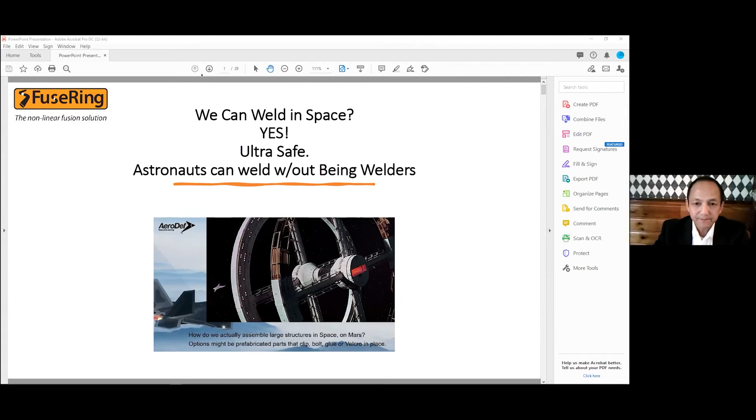If I may just read some history by NASA. This is a review of welding in space and related technologies, NASA 2020. Deployment of welding and additive manufacturing technologies in the space environment has the potential to revolutionize how orbiting platforms are designed, manufactured, and assembled. These technologies offer the option for repair of sustained damage to habitat structures on space missions, as astronauts will be able to manufacture new parts and weld cracks.

An added benefit is that required repairs can be achieved more economically, as new parts need not be shipped from Earth. With further maturation of in-space welding capabilities, astronauts can operate under given standards and weld damaged structures rather than rely on cargo resupply. Next.

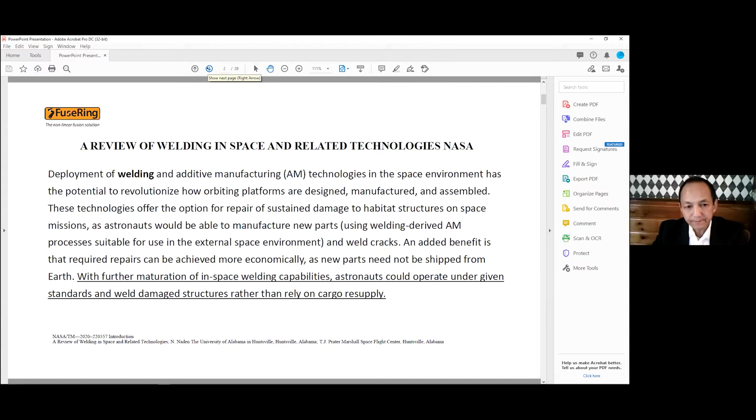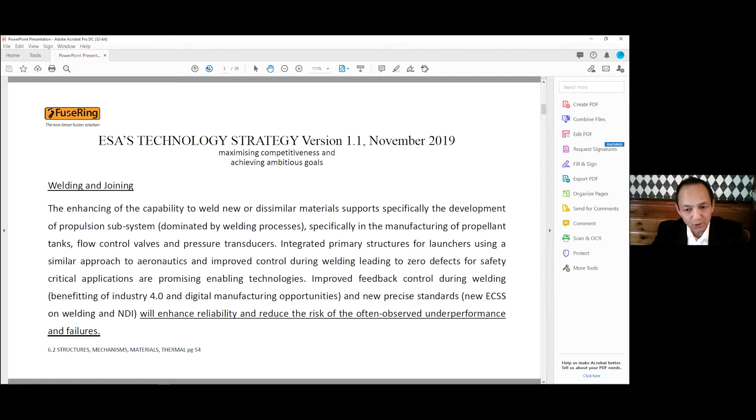And this is from the European Space Agency, November 2019. I'll just read a little bit. Welding and joining will enhance reliability and reduce the risk of the often observed underperformance and failures. So they're looking for solutions also. Next, please.

So just briefly in history, the Russians were the first to weld in space: 1969, Soyuz 6 with the Vulcan welding unit. NASA followed in 1972 with the electron beam. And since then, it all came to a stop, and nothing's been done for the last 45 plus years. My belief is it was never pursued because NASA and Russia deemed welding in space too dangerous and they could not scale. Next, please.

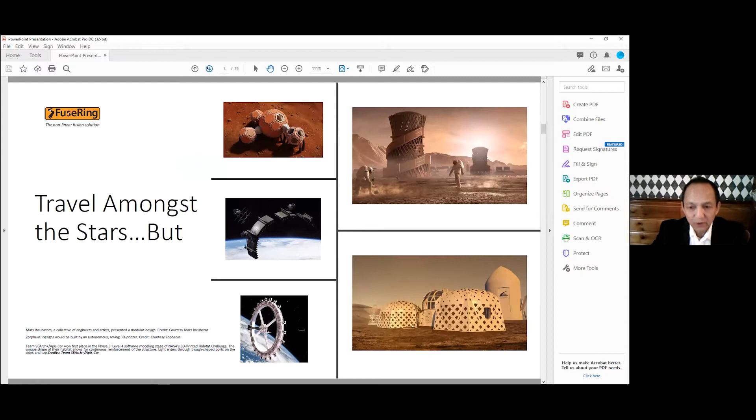So I think it's the aspiration of mankind to travel amongst the stars. And some of these structures on the right are the winning designs given by NASA. But before we do that, we need support structures, as Dallas mentioned, and a few other folks have mentioned earlier. We need a Pony Express, an outpost, charging stations, just like in the old frontier days. Next, please.

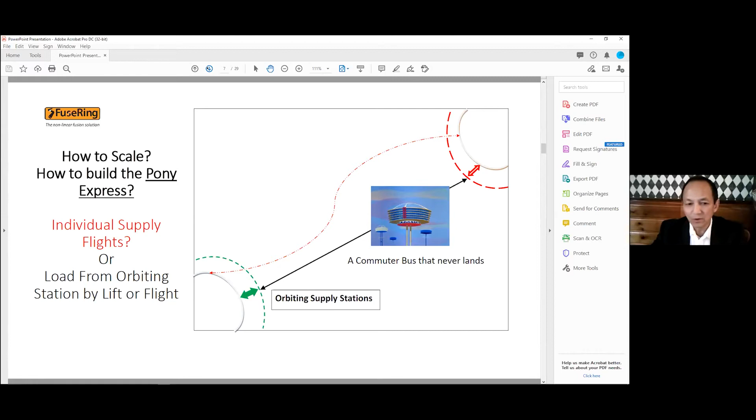Now, if we agree on the assumption that we need to scale, we need to build the Pony Express, the question is, do we do individual supply flights where we take off, carry the load, land, and leave the infrastructure on Mars or on the moon? Or we load from orbiting stations by lift or by flight? Remember the Jetsons, this is what I call the commuter bus that never lands. So we load from orbit, travel the distance, unload, come back. That's it. It never lands, it never touches Earth or the moon or Mars. Next, please.

So if we agree we need space stations and infrastructure on Mars and beyond, just like the movies. My first sci-fi movie was 2001: A Space Odyssey, 1969, I think. So how do we assemble large structures in space and on Mars or the moon? Today's options might be prefabricated parts that clip, bolt, glue, or Velcro in place, amongst a few other things. Next, please.

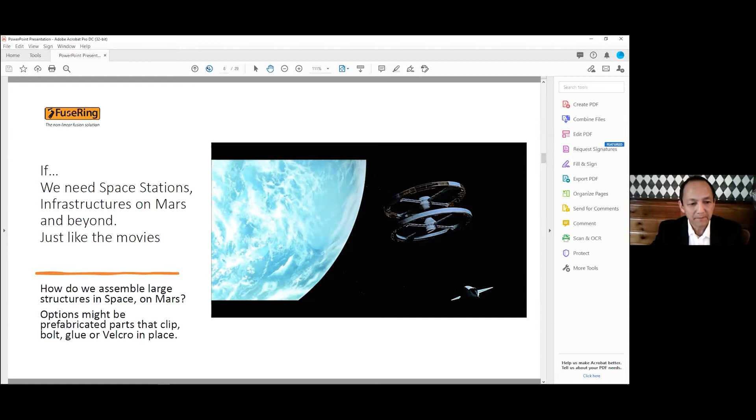But the support structures, whatever we build, must be robust. Permanent space stations must withstand vibrations and the odd impacts, because if that bus goes between Earth, Moon, and Mars, one of these times something might happen, it'll bump into something. And how do you repair that?

And the structures on Mars must withstand windstorms. If I believe Matt Damon and The Martian, the windstorms on Mars can be severe. But much more to learn about that. Next, please.

So there are different options to weld. Welded structures offer strength and rigidity. It can be repaired on site without waiting for replacement parts. This is one of the most efficient, the fastest welding. One of the options is K-TIG by Australia.

Welding in vacuum and zero gravity offers challenges, but there are options. Techniques are fast, works for thick and dissimilar material. But this technique doesn't work in zero G. It works in vacuum, but not zero G, because when they melt the metal, the splatter cannot be accepted. Next, please.

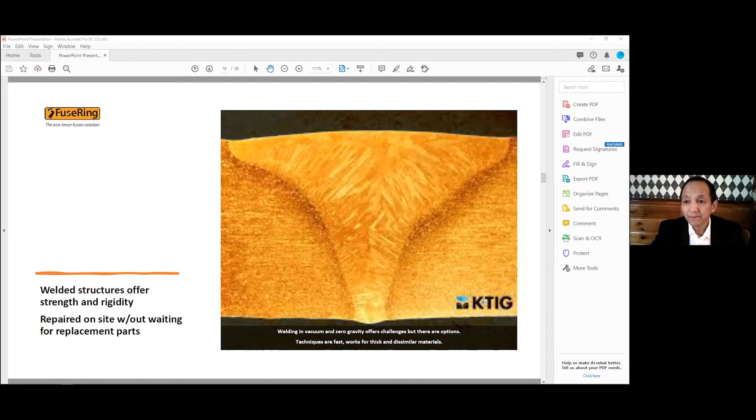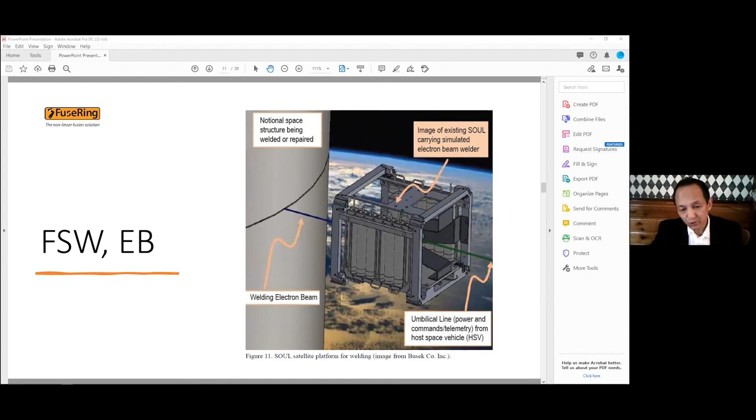So friction stir welding and electron beam are the current accepted options. The picture on the right, as I'm sure you folks know much more than I do, is electron beam proposed and researched by NASA through a company, I think it's in Florida. The electron beam on an umbilical cord. Electron beam is great, but there's other issues with that. Next, please.

So, to get to the heart of this presentation, what if there is a weld that is truly automated, autogenous, fine grain base to base, in compression, low to no residual stress? That's an assumption for now, being tested and verified by an institution. It resists embrittlement, and there's no fusion line. It is ultra safe and zero toxic fume.

For pipeline and confined space, the toxic fume is becoming a very real issue for Earth applications. And the embrittlement is not so important for space because we don't have hydrogen embrittlement out there. We have radiation, but not embrittlement. Next, please.

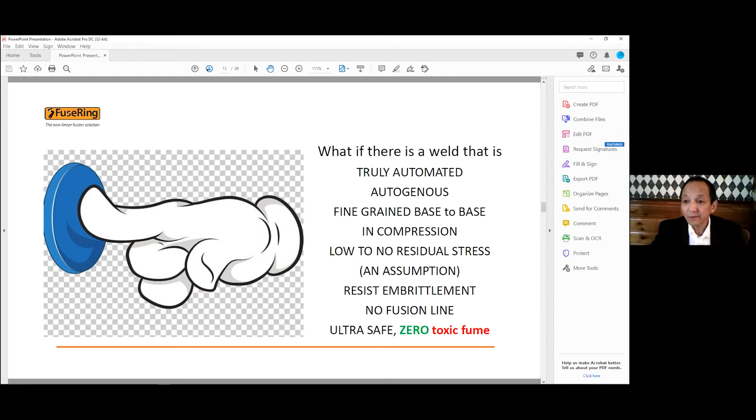So, what if we have an alternative that delivers this quality? For the non-welding folks, this is one of the best welds on Earth right now. No BS, on the level. None of our overseas competitors have this ability or the concept to make this quality. Next, please.

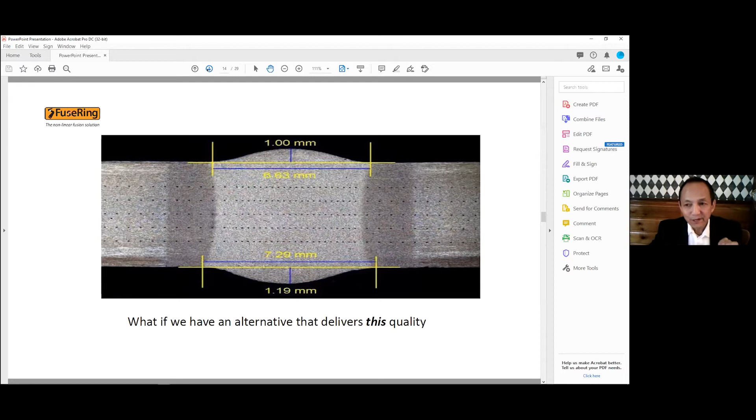I'd like to talk about solid state induction. There are three variables. The quality and the integrity is documented in real time at the job site, in orbit, and at HQ, like in Houston or on Mars or on the moon. There's no interpretation required, strictly by the numbers.

The majority of the power is induction heat. It supplies over 95% of the required power to join metal. Shear and forging force comprise less than 5% of the total required energy input. That is significant. So on the comment on the left, this technique welds with technicians, not welders. So astronauts can weld in space without being welders because there's no human input. Once you set the parameters, you're done.

Pardon me. Once the parameters are set, there's no further action. It is one shot, less than 1 minute per weld, regardless of size or thickness, and is repeatable. And for tubulars, there's no root weld. For space, it is not important because we have no liquid on the inside to go through. For the OD and ID, they're identical, and we can regulate the profile to be flat. Next, please.

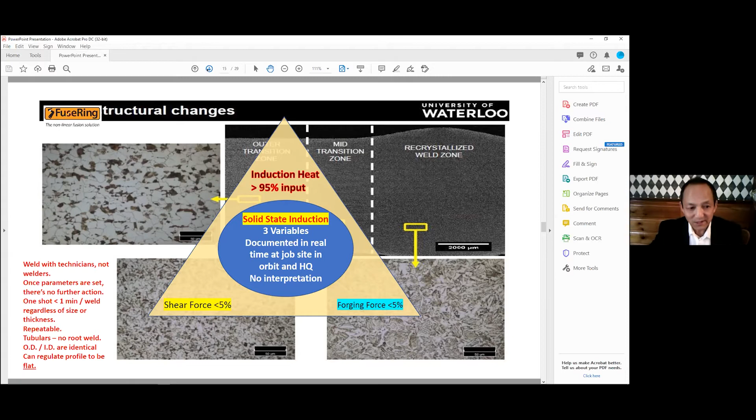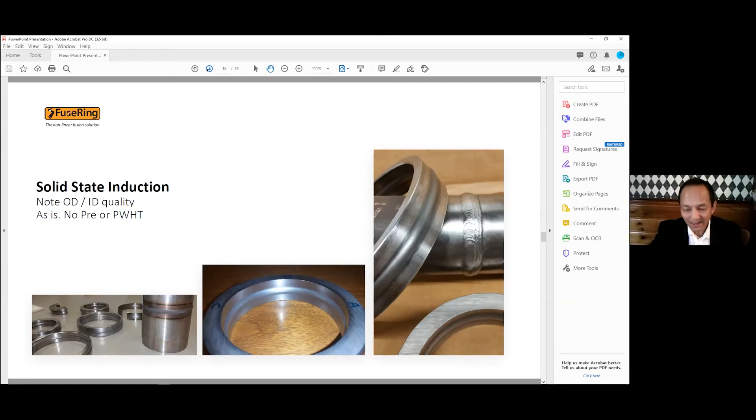These are samples of the welds done today. As is, please note the OD and the ID for the folks in manufacturing and the corrosion specialists. There's no preheat, there's no post-weld heat treatment. As is, the minute it's done, boom, that's it. What you see is what you get. Next, please.

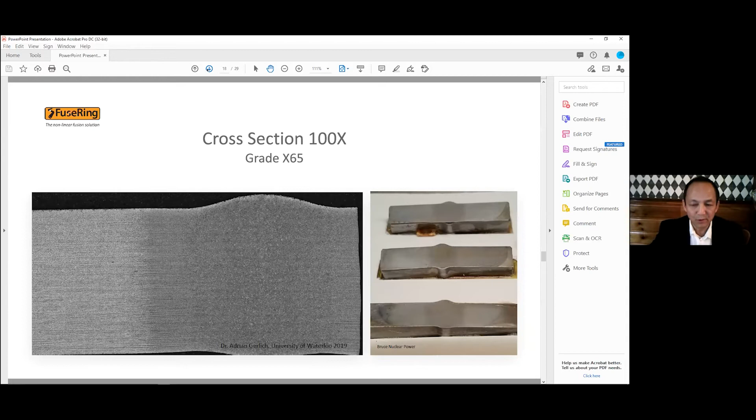And this is a cross section on just a regular grade X65 line pipe, nothing spectacular about the metallurgy, but this is a cross section. There's no fusion line in the middle. There's no heat affected zone. There's a heat transition zone, no question, but there's no heat affected zone. And the 3 samples on the right are from Bruce Nuclear Power, given to me with permission to publish. Next, please.

So to go back to the basics of what this is all about, recall in high school, we're told when you weld, keep both parts absolutely stationary, don't move it, and then put your stick in there and fill the gap. And afterwards, don't touch it, let it cool. But the problem there is we have 2 heat affected zones on either side of the weld. And that's a weakness. We'll come back more to that later on.

So the brilliance of this technique is this inventor said, one part keep it locked tight shut. Put a heating paddle between the work faces. Traditional thinking up to today mostly has been we heat the girth around on the outside.

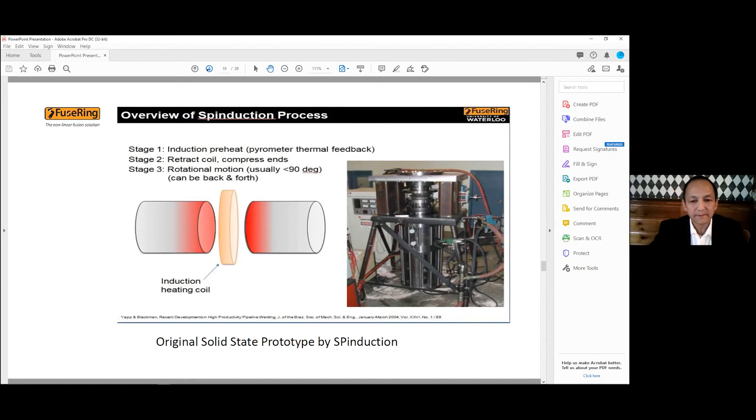But the brilliance of this invention is you heat between the work faces, up to a certain temperature, pull the heating paddle out, push the other part in and rotate, or rotate and push the other part in. By movement, you break the crystalline structure. That's why the crystals are so fine. And you relieve all the pressure. For pipeline and the hydrogen embrittlement that's coming up for the European and the US market, that is a critical, significant difference. So next, please.

So at the end result, when you take the heating paddle out, you move it in, you rotate. And it's just a little bit of a rotation. You don't need a whole lot. And it's not friction, because with friction you go a million miles an hour, dangerous, but there's just slight movement. Next, please.

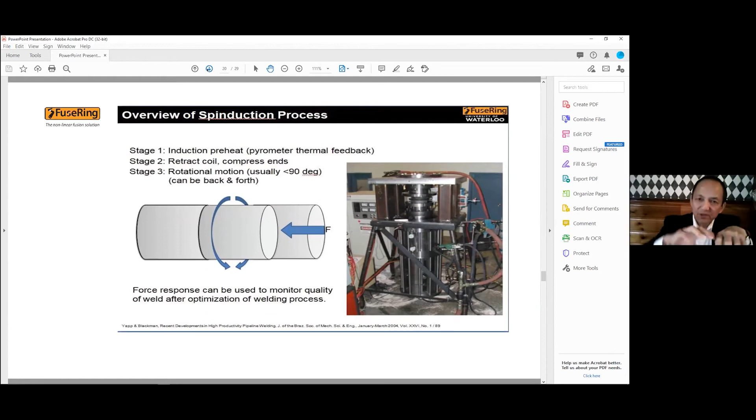So for the metallurgist, this is one of the finer details of the crystalline structure. To most of us, it doesn't mean that much, but it is significant. The crystalline structure on the left is the base metal. The bottom left is the base metal into the heat transition zone. And the middle picture is the middle of the heat transition zone.

But the most important is the bottom right. It is the beginning of the heat transition into the recrystallized zone. There is not that much difference. The crystals are fine grained. I have more on that, but if you're interested, we can get more into that. Next, please.

Fundamentally, this is the difference between what was invented and the FuseRing technique. The old method, as mentioned, one side is stationary, put a heating paddle between the work faces, pull it out, push the other part in and rotate. The FuseRing concept is what happens when you come to the last joint at an expansion joint or a valve for pipeline. Those are big stuff. You cannot move either end. Or in a nuclear reactor where the feeder tube comes in and the manifold is this side, you cannot rotate either side. What to do?

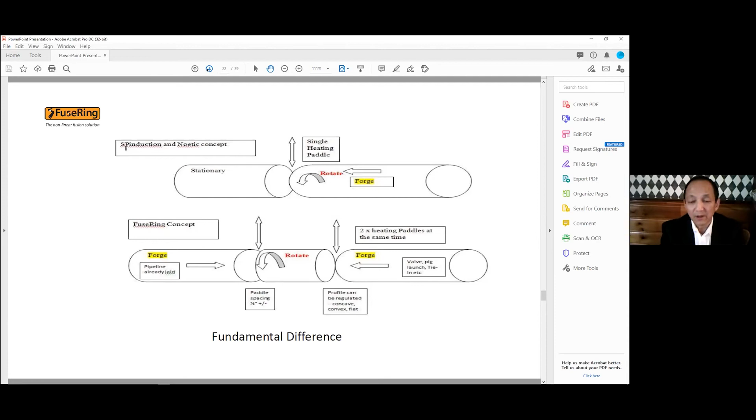My proposal was you put a coupler in between the two sides, heat both faces, pull the heating paddles out, rotate the coupler and push. The two ends, one of them might move laterally, but they'll never twist. So you rotate the coupler instead and push the one end in that can move laterally. And the USPTO says, yes, son, we agree. And they gave me a couple of numbers, granted. Next, please.

With this technique, we can work for three-dimensional structures. Tubular pieces can be assembled in 3 dimensions for space assembly using fuse ring technique. Fuse ring can be used to complete circular rings for, say, space station. We can assemble very large structures using this technique. Solid state fusion and fuse ring technique allows welded construction on the moon, Mars, and beyond. Next, please.

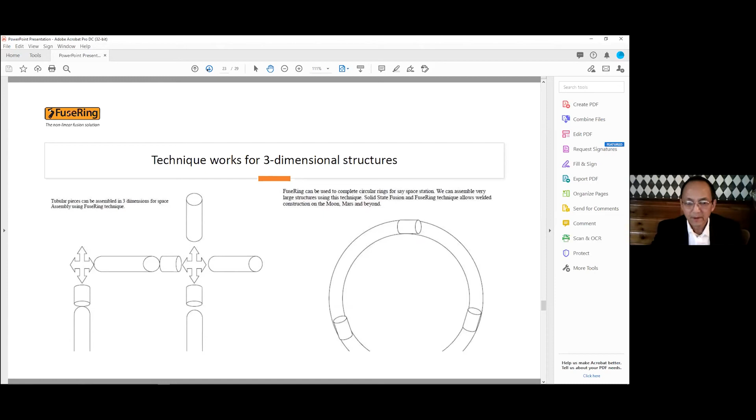So fuse ring joints, I've moved beyond that. Further IPs have resolved the problem. The puzzle has been resolved. We can use this technique to join flat, curved, and tubular geometry, regardless of size or thickness. So the applications are pipeline, refinery, nuclear refurbishment, shipbuilding, pharmaceutical, and food. Pharma and food is important because we offer a smooth ID, and that manufacturing sector needs and demands a flawless ID because they cannot have any germs or any bacteria buildup.

And we can weld shut spent fuel container lids next to fuel pellets safely because the technique is automated and it resists embrittlement on the inside and the outside against the hydrogen embrittlement. The third one, we can join 3, 4, 5-inch thick hull with no flaw. Submarines can dive deeper with certainty because we have no heat-affected zone. And it can join irradiated material because it's automated, it's one shot, and it's solid state. No human ever needs to be near the process.

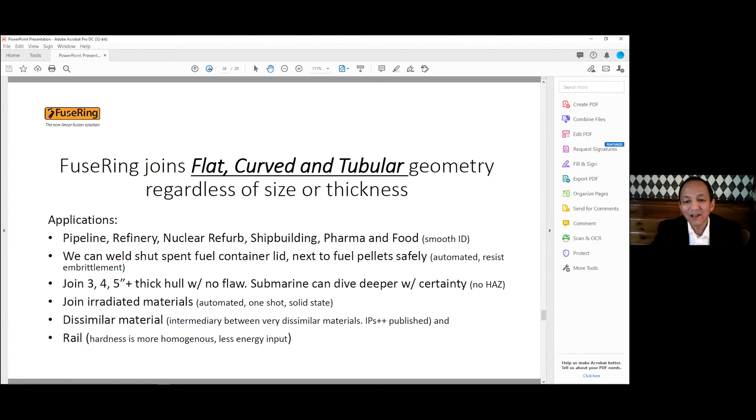For dissimilar material, intermediary between very dissimilar materials, the IPs are published for the automotive, for nuclear, different parts. But the last part, the most recent IP filing, is rail. The hardness of this technique is much more homogeneous and it takes less energy. Next, please.

So to make some money to pay for all the IPs and the presentations, rail is the lowest hanging fruit. They have pain. Fuse ring is the solution. And as a comparison, today's technology on the left is linear friction, sponsored by the government, because they're looking for better methods to join rail. And I'll explain that in a little bit. The top right picture is flash butt. It is the accepted technology for the last 50 years, because that's the best we can do. We accept it and we live by it. We live with it and we work around it.

Linear friction is the new exploration area. The heat penetration is less, but the forging force is huge. And so far, they have not been able to overcome that forging force, so it has not been able to be portable. The fuse ring offer, our heat penetration is in millimeters, single digits, millimeters. The remaining forces, the shear and the forging, are less than 5%. It's insignificant. So it can be portable and the entire process can be electric. Next, please.

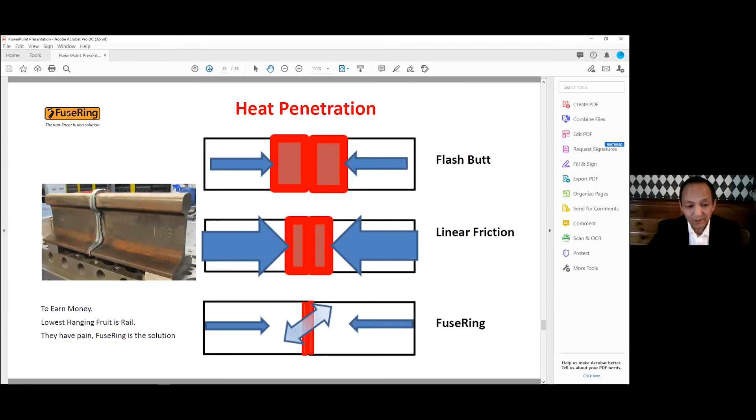The picture on the left is a picture of rail with two heat affected zones today. And if you look at the picture on the right, the two dips are the heat affected zone and the softness that goes with a traditional heat affected zone in flash butt welding. They go about almost an inch either side of the weld face. We accept it around the world. In the global economy, the global rail industry accepts these two dips because it's been fine all these years.

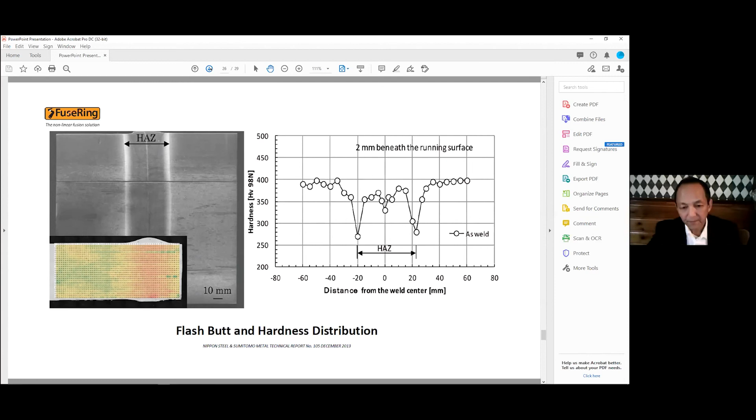But now rail load, speed, and intensity is increasing. Every load is heavier, faster, and they're coming in faster in between the travel. So repair and maintenance is getting to be a significant issue. If I may just point out, the smaller picture on the bottom left is a hardness mapping of the Fusering solid state technique. Hardness mapping is much, much more homogeneous. We don't have this particular dip issue.

Next, please. So just in brief summary, Fusering is in discussion with US and European companies to demo, mature, and scale this technique. Number one, as mentioned, the lowest hanging fruit is rail, because they have pain, I have solution. Second is pipeline for hydrogen. Hydrogen embrittlement is a big, big issue around the world. And as far as I know, the Europeans are quite a bit ahead of us on the renewable pipeline infrastructure, because they're studying a lot. And I've attended some of them, and it's a serious concern.

And the last one is a proposal to send a demo weld unit onto ISS for aluminum. We've done steel and titanium. Technique, quality, perfect, flawless, same as what you see. But aluminum, I don't believe anyone has tried this on Earth yet. So I would like to propose a miniature that fits inside Bishop as mentioned, probably something in a few kilowatts of power. And the size will be maybe 1 inch OD by 1/8 of an inch wall thickness.

It can be done. I've been asked, can we do more with this demo? But I said, let's just do one thing right once. Make it historic. Come back and do another one, we can do more after that. Because if I screw up the first demo, if the first weld in 50 years fails, then we might not try welding again for the next 50 years. So make it significant, make it work, make it simple, and then we can plan further, bigger, more complex demos.

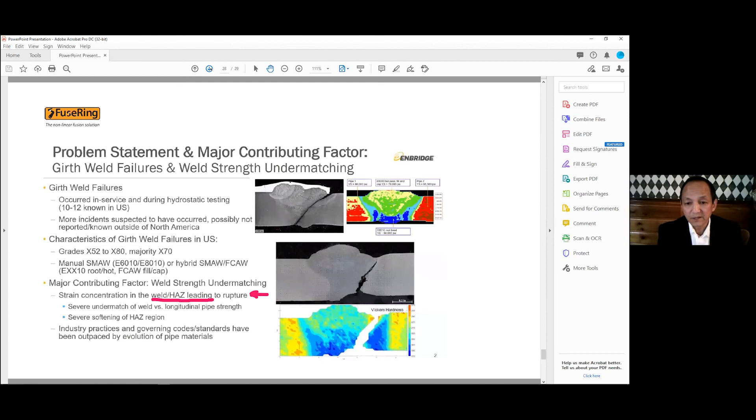Next, please. And the last slide is a report by Exxon. I think we have an Exxon R&D person here in the audience, I'm not sure. But anyways, using your studies, the girth weld problem is undermatched. The line pipe, the heat affected zone, the softening, as with the rail, are critical issues. So we offer a better technique, a better way to do things, but we are up against very well-established traditional industries that have a built-in interest to keep things the way they are. But that's reality, and that's what we're working with.

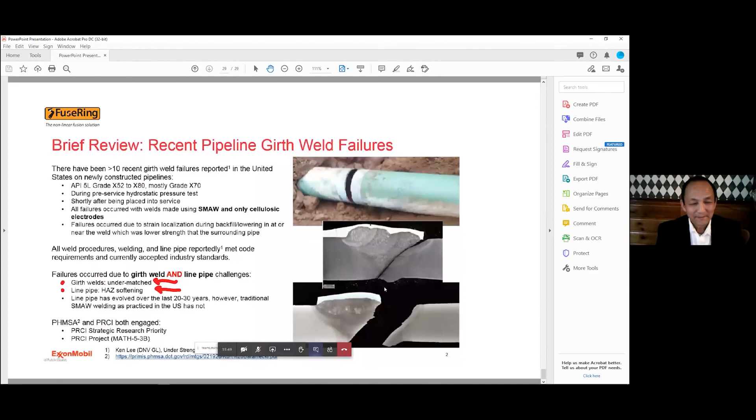Really appreciate that. Most folks on this call, most folks in the industry do not have your kind of industrial background, right? So part of what we're trying to do with this event is intentionally to reach out to folks that are not typically in our sphere and find out what innovations they've got. Somebody in the chat earlier was asking about heat dissipation in space. For these enormous space-based solar power systems, figuring out how to get the heat off of those systems is really complicated. There is going to be some sort of radiative environment. Somehow you're going to have to hook these radiators together, right? Ultimately, you're not going to build what you want to build in space without figuring out the basic requirements of welding. So thank you for that.

You bet. I'm learning too, because I spoke with Ajith, I think I can mention his name, with Nano, and I learned a lot from him. Because when you have an experiment in space, I didn't realize the ISS has power limitations. I always thought all those solar panels got tons of power, but you don't.